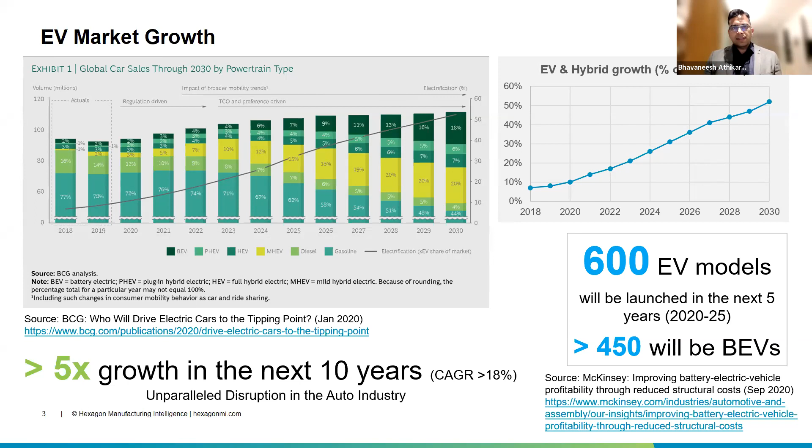But yeah, the technology which is used for the battery and the e-motors is changing and evolving. So that's an area where a lot of changes are happening. But these kinds of disruptive changes are happening in such a short period of time. So are we ready for it, or is the industry ready for it? What sort of disruption it would cause is a question which we need to think about.

Composites have been used. Also the battery technology, cabin interior. Mr. Mansingh talked about the challenge with acoustics we had with EVs, because the masking effect of the IC engine is gone. So BSR, buzz, squeak and rattle, becomes an issue with EVs. So cabin interior comfort is becoming another important aspect to address.

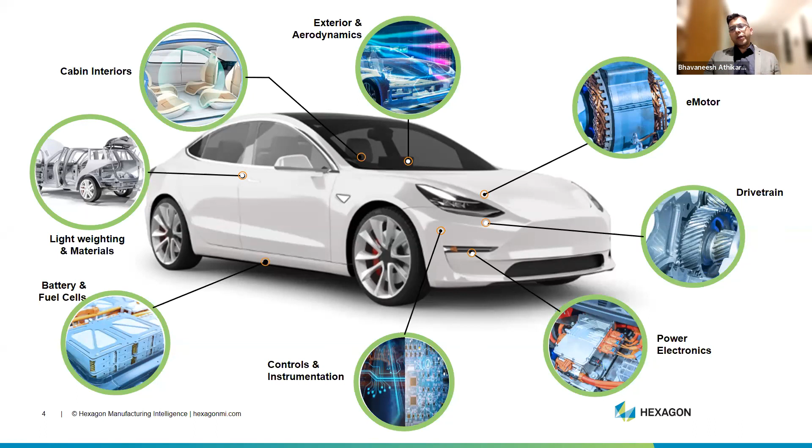So let me talk about the key design and manufacturing challenges for e-mobility today. These are some of the key challenges, not all. So first and foremost, which used to be the range anxiety issue, but it looks like the industry is addressing this challenge, and we are seeing a lot of development. Last week, we heard about the Mercedes announcement of the high level of range it had on a single charge. So how can simulation help here?

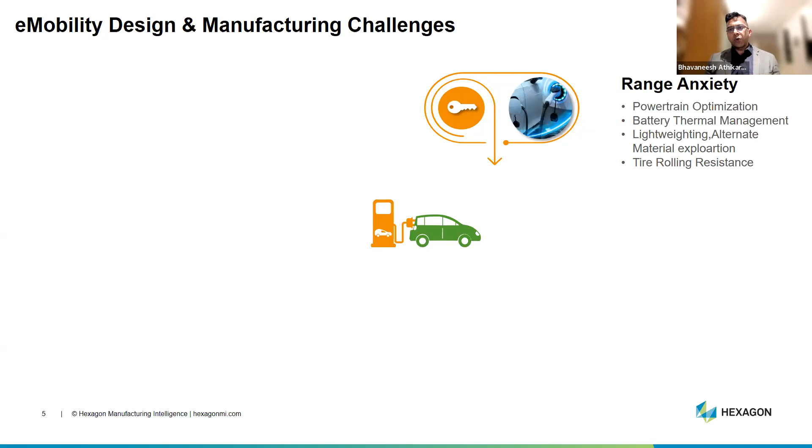So some of the ways we can address range anxiety, other than the policies and having a lot of charging stations: from a simulation or design point of view, the areas where we can add value are powertrain optimization, battery thermal management, lightweighting, alternate material exploration, and also innovation with tire rolling resistance. The second point is on manufacturing and quality assurance.

Now with new components coming into EVs, the expertise and skill needed to manufacture them is missing. So that's becoming another big challenge, manufacturing these subsystems, and also using the latest manufacturing techniques like additive manufacturing, or using dissimilar materials and joining them together.

So the conventional approach of welding them might not work. Can I use adhesive? Can I use rivets? How would be the strength? So those are some of the challenges.

Digital twins, as we've discussed in the panel discussion, and also the companies like Simple Energy, where Shresh just talked about, they are using the latest of technologies, and also the existing OEMs are moving towards best of manufacturing facilities what they have. They're moving more towards Industry 4.0. So for improving the productivity and efficiency, they're using a lot of smart manufacturing solutions. So that's another area of interest for EV development.

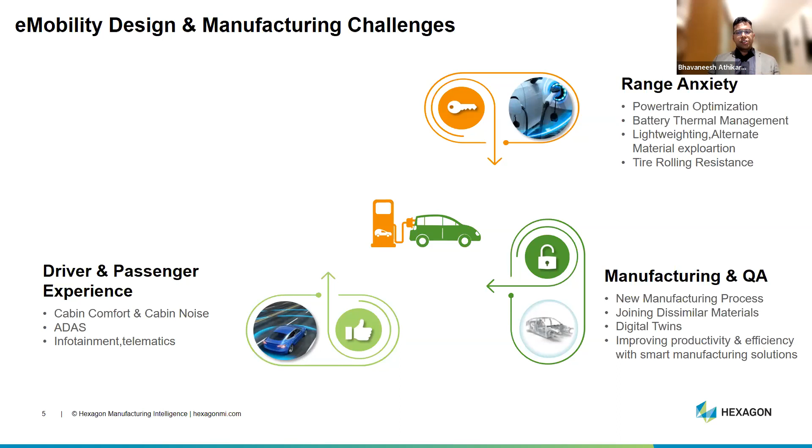And the final one is on the safety and the vehicle performance aspect. Safety, we have discussed now in the panel. Yes, there are a lot of safety related challenges which can be addressed through simulation, which I'll be talking on the coming slides. And also when we move to electric vehicle, the basic expectation is the vehicle performance should not be less as compared to IC engine, if not better.

So we have to ensure the acceleration, torque vectoring, vehicle dynamics aspect, noise, vibration, and harshness, durability of the vehicle. So that need to be addressed. So these are the 4 areas where simulation can significantly add a lot of value.

And that is what we are highlighting here on how upfront simulation can help. So with simulation, without even having a proto, you can generate a lot of what if scenarios. Innovation can happen in that concept design stage. And that is where you have a lot of flexibility to change around and play around with the design, and also will help you to reduce the cost a lot.

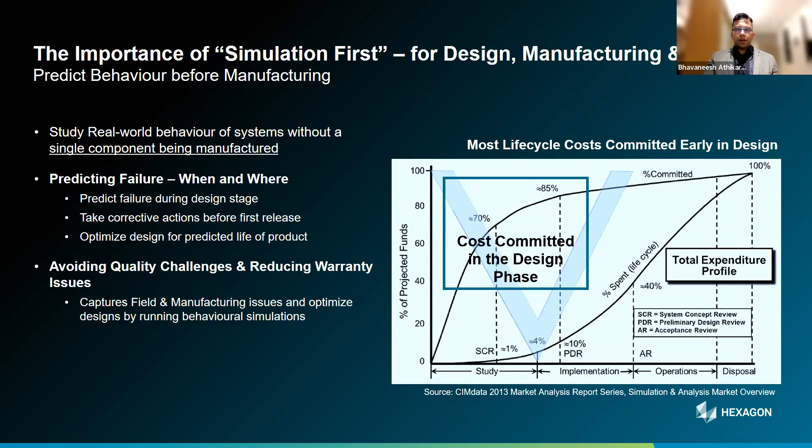So moving on to what are the key CAE or simulation solutions specific to electric vehicles. If you take the key subsystems like e-powertrain, the kind of noise generated from it, though it is not very noisy, the whine which comes out of electric powertrain is very irritating. That need to be addressed.

From a battery point of view, battery thermal management, cooling optimization, battery structural safety. As we discussed, the batteries are mainly at the bottom of the vehicle, and when a vehicle goes on a bump, an impact load which can short circuit a battery should not happen. So the battery structure should be strong enough or designed to take such loads, if any. And also from a body structure point of view, how different dissimilar materials are joined together.

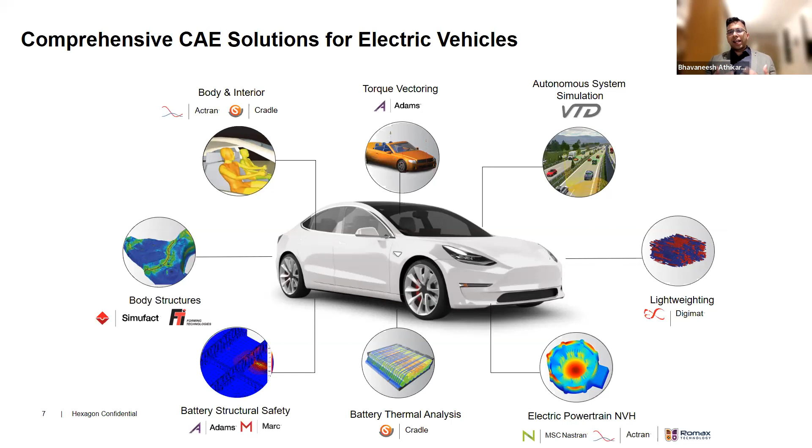Interior aspects, as I said, cabin comfort, torque vectoring, and also with e-mobility, there's also expectation of it being smarter. So how do we at least get some level of autonomy into our two-wheelers and four-wheelers today? That's where tools like virtual test drive can help you in designing these virtual scenarios and evaluate what if scenarios, the edge conditions, on validating your advanced driver assistance systems, advanced rider assistance systems upfront.

Similarly, for two-wheelers, most of the concept is same, but again, there are something very specific as well for two-wheelers. And one of the requirements is if a company whose USP is the sound or thump of the vehicle, then when they move to electric vehicle, the thump is lost. And as a rider, I love riding a vehicle which can create a good sound. So to address that sort of challenges, it's not a challenge, it's to address customers' requirements.

So there are a lot of companies looking at simulated noise or creating a signature noise of vehicles. That's something, again, we're working with a lot of two-wheeler companies on, not only two-wheelers, four-wheelers as well. As you know, the kind of sound a Ferrari can make, any EV cannot beat that, right? So how do I address that sort of a customer segment is also something which we need to see. So safety, performance, and value add are other aspects where simulation can play a big role.

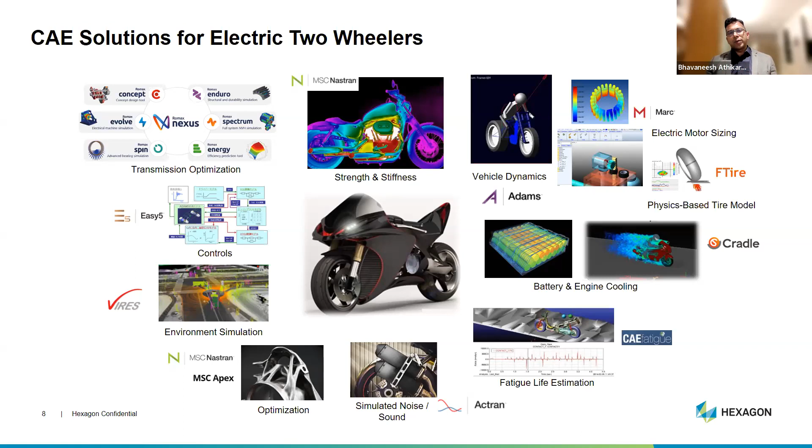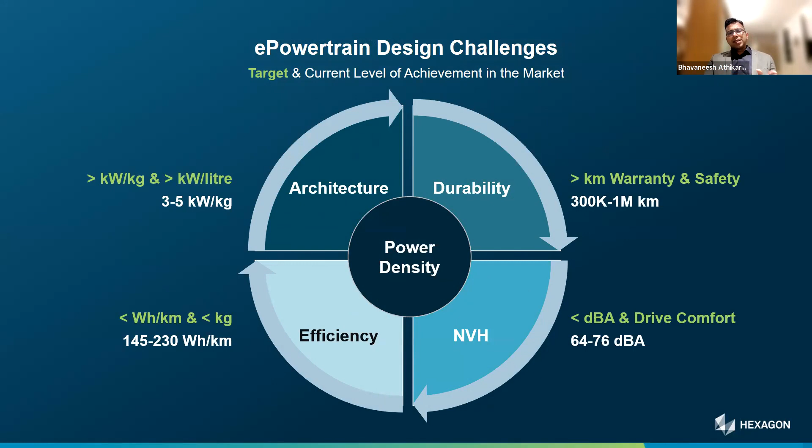So let me take some of the key components of your EVs and talk about how simulation can help. So the powertrain is almost like the heart of your EV. The challenges are from the durability, NVH, efficiency, and architecture aspects. These are some of the target ranges which are given.

But from a complete holistic development of e-powertrain point of view, we have solutions which can address architecture, efficiency, dimensional quality, thermal management, CNC aspects, and fatigue life estimation. Also, these e-motors and electrical components emit their own electromagnetic field, which needs to be shielded well so that the other electrical components function well. So EMI shielding, or electromagnetic interference, is becoming another key area in electric vehicles. Here again, we can explore different materials which can provide this sort of EMI shielding.

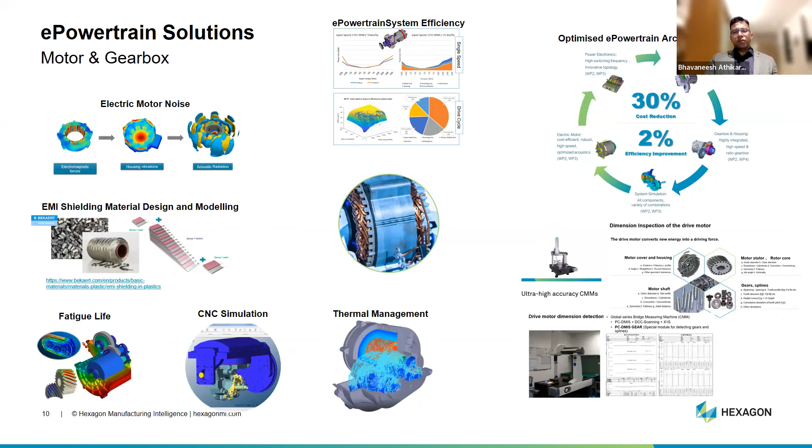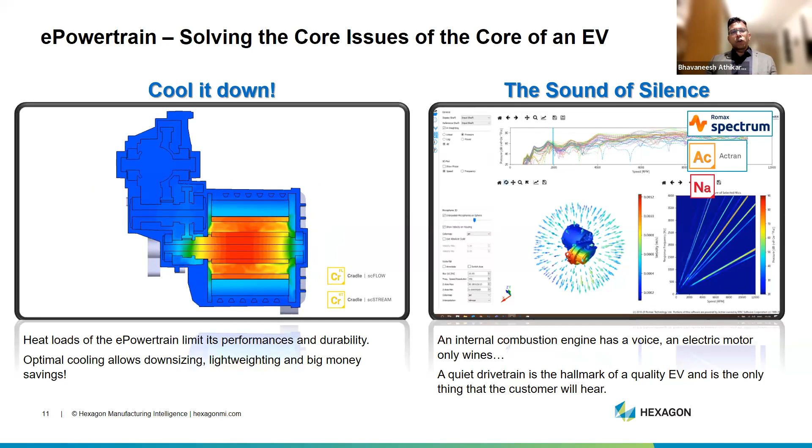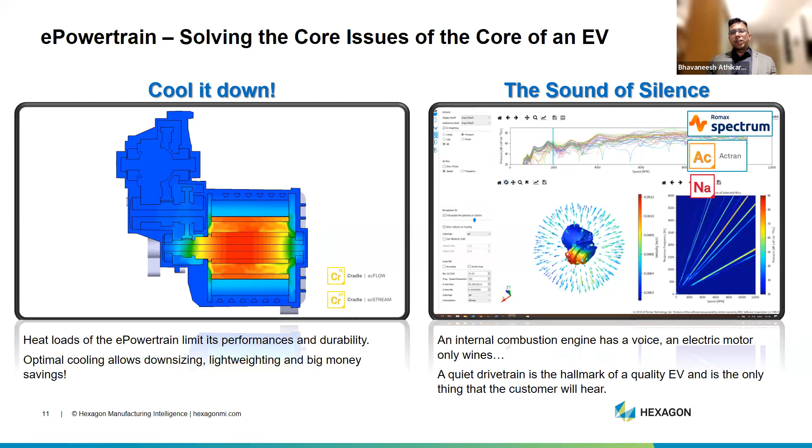And finally, the kind of noise generated from electric motors. So for the e-powertrain, the core thing the industry is talking about today is, one, how do I make it more efficient, the thermal management challenges. The other is the noise aspect. So we have workflows in place on how we can address these issues from powertrain thermal management and also noise from the electric motor. As I said, this might not be of high decibel, but the whine is an irritating noise which can irritate a lot of passengers within the vehicle. So that needs to be addressed as well.

So how are we uniquely placed? The solutioning we put together connects three important parts of product development of any electric vehicle subsystem or a vehicle as a whole. Design and validation is where you do a lot of concept designs and try them out in your virtual environment. Once that is done, that information is passed on to manufacturing, where you act on the information from design and validation and actually manufacture it. Once it is manufactured, using our metrology devices, we ensure that the quality of these subsystems is as designed.

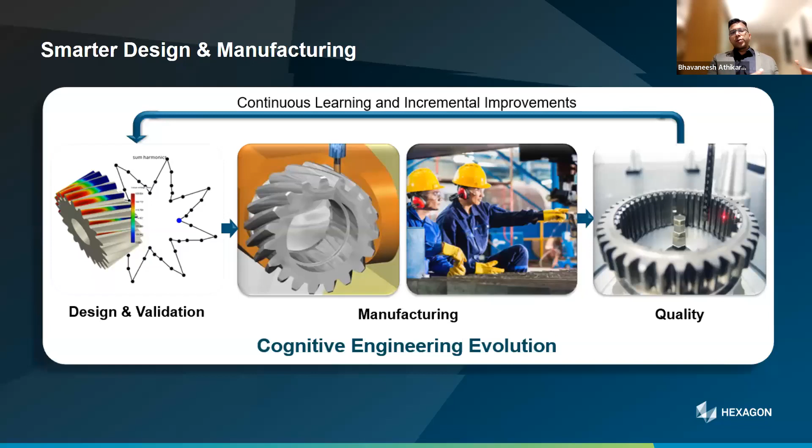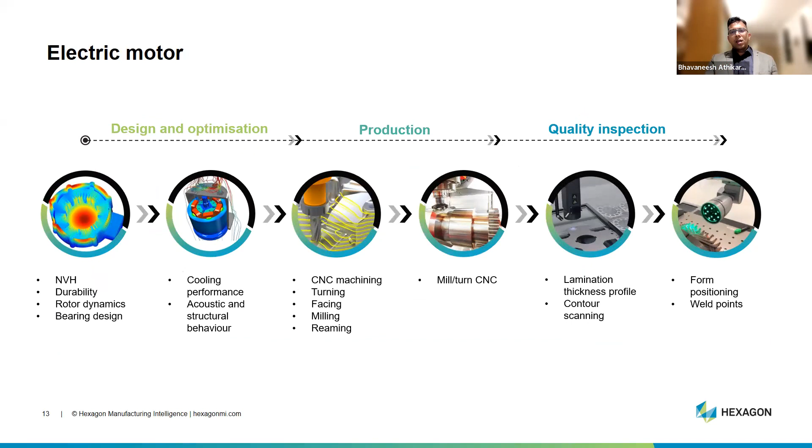So if there is any deviation with respect to the design, that information is passed back to the design cycle. This whole loop can be automated so you would have less or no difference between what has been designed and what has been manufactured. Based on that theme, for each of the key subsystems like the electric motor, drivetrain, and battery, we have workflows from design and optimization, production, and quality inspection point of view.

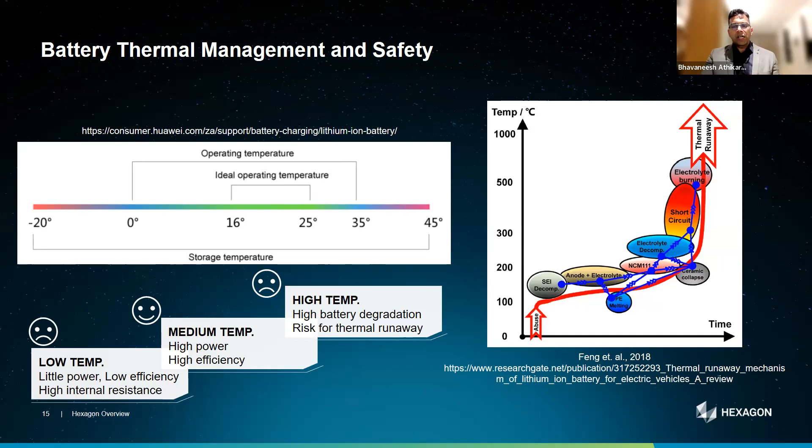So from a battery point of view, we discussed a lot about the issues and challenges we are facing today. This is a topic of very high interest in our country these days. If you look at this chart, it shows the optimum temperature for the battery to perform at its ideal condition: 16 to 25 degrees. Operating temperature is from 0 to 35, and storage temperature can be minus 20 to 45. So we have challenges at low temperature as well as high temperature. Low temperature means little power, low efficiency and high internal resistance, and high temperature means high battery degradation and risk of thermal runaway.

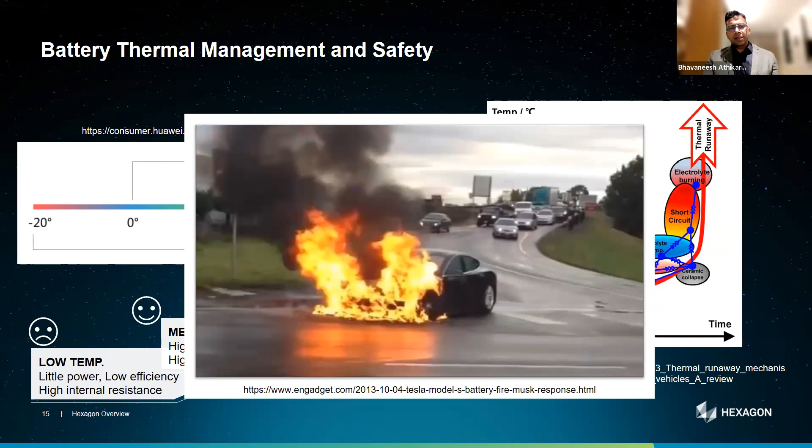So whatever you're seeing here today in India is not new. Globally, this is an image of a Tesla incident which happened a few years back. So this has happened in the past. It's not new, but how do we mitigate these sorts of incidents? That is where simulation can play a big role.

From an experimental test point of view, first, you definitely should have a strong, rigorous standard for evaluating these subsystems, which are very much safety critical. The key challenges with experimental testing are that it takes a long time, you need a prototype, it's expensive, and you need a suitable test facility. That's where numerical simulations can help you with less effort and model preparation time. We can set up these workflows for you so you can quickly test out the battery system against the validation plan you have.

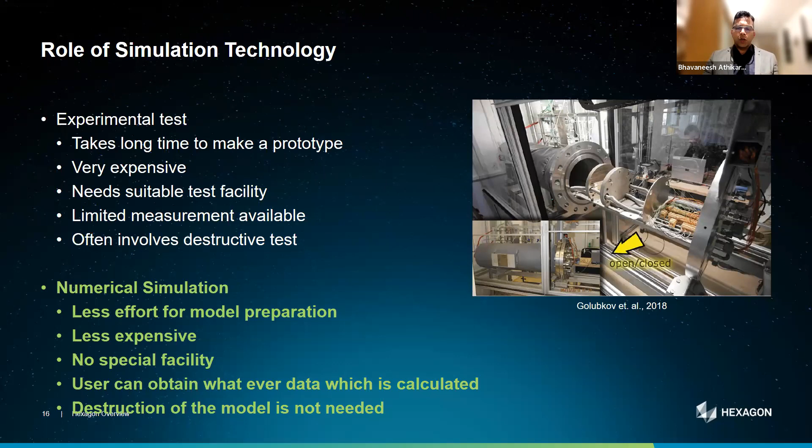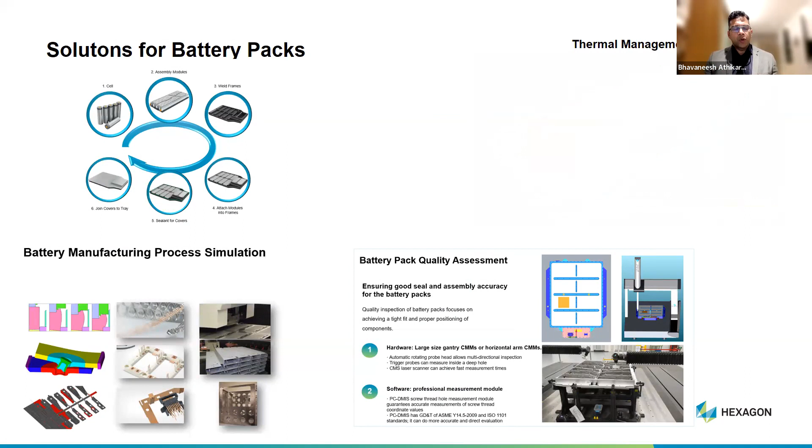Similarly, that was from a thermal point of view, but there could be other challenges for battery pack manufacturers on how these battery packs can be manufactured. From a manufacturing process simulation point of view, we can add a lot of value by helping the design process to be first time right, and also innovate at an early design stage.

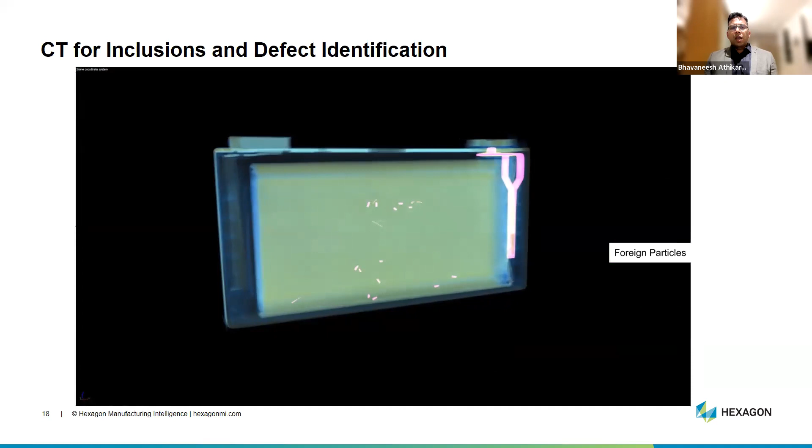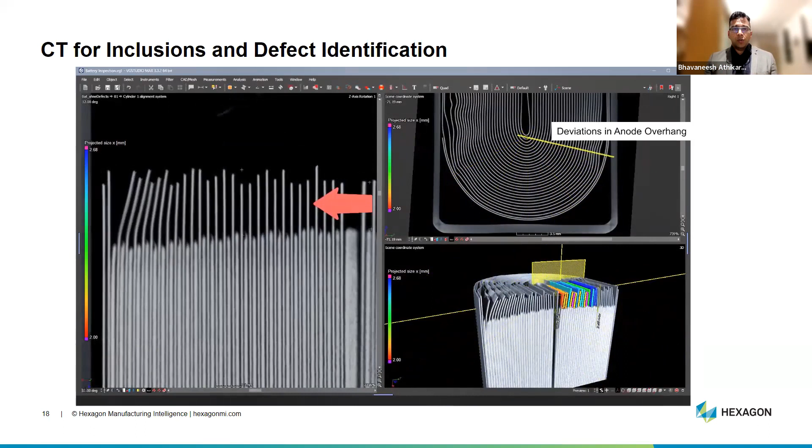Ensuring the quality within the part is another important aspect. For these parts, most of the time, if you want to see the inclusions and other defects within a battery, you need to cut it open. That's where computer tomography plays a role. This animation you're seeing here is of computer tomography from a software called Volume Graphics, which is us, showing all these variations and inclusions within your battery structure, helping you identify them without breaking it open.

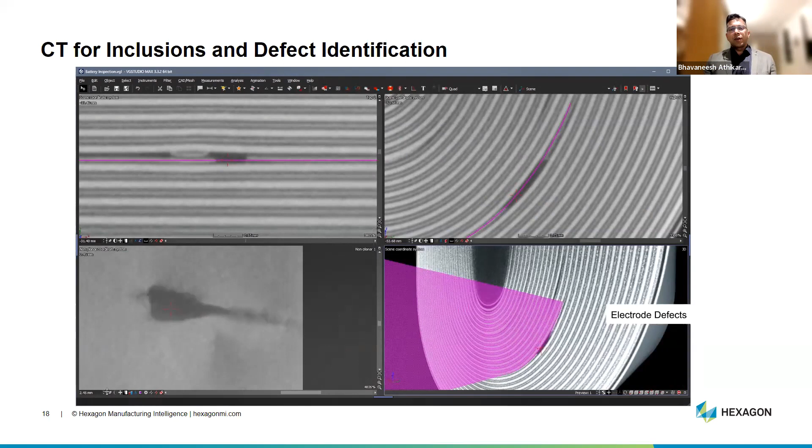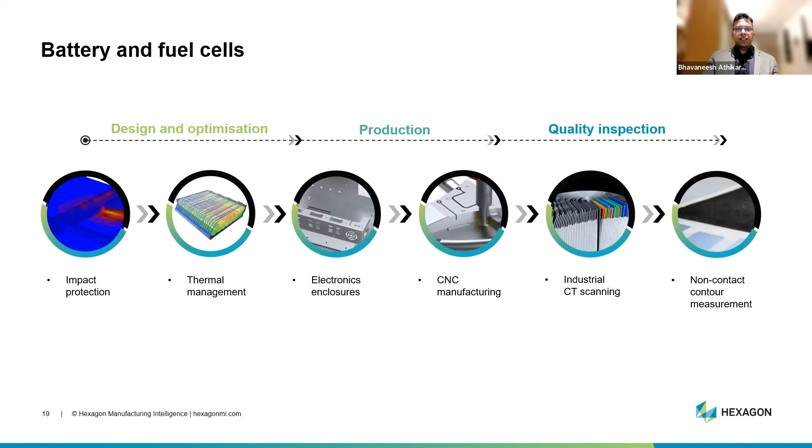Similar workflows for battery and fuel cells as well. We have these workflows built in for most of the key subsystems.

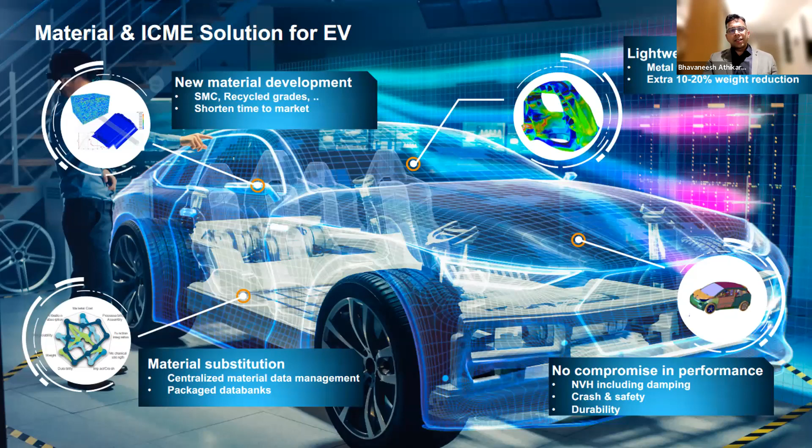Moving on to another important topic, which is material. I believe material will play a significant role in electric vehicle development, not only from a lightweighting aspect, but also from the performance aspect. From a range enhancement point of view, there is a lot of focus on using unconventional materials, or industry is looking beyond just metals today. There are also performance plastics which can do much better than metals and can be much lighter as well. There were a few challenges of mass production and repairability, which are being addressed today to an extent.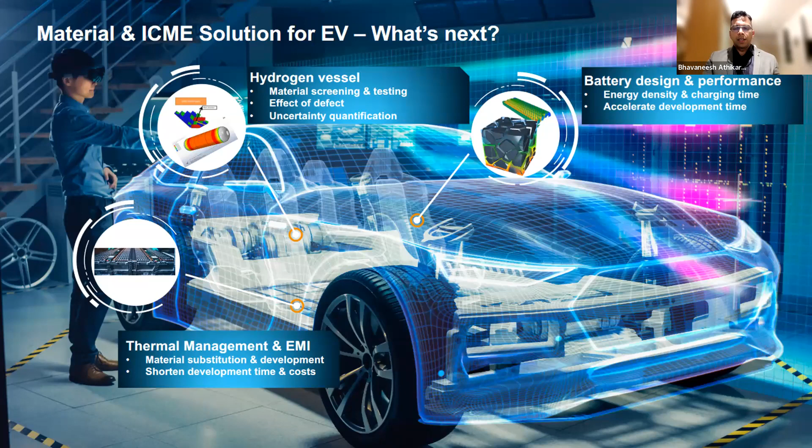When I talk about material, it's not only about the external body or load carrying members, it's also about increasing the energy density and charging time of a battery. We can also explore various battery materials which can be used, or the enclosures, battery packaging, EMI. All those aspects can be addressed by virtually simulating them in the design cycle. This is about the manufacturing process simulation.

There was a question on this which I discussed. This is what we can do if you take any manufacturing process from machining, forming, forging, stamping, welding, heat treatment, or even costing studies, can be done in the design cycle, ensuring that when you manufacture the part, it's first time right. So we can ensure that quality by optimizing the process parameters.

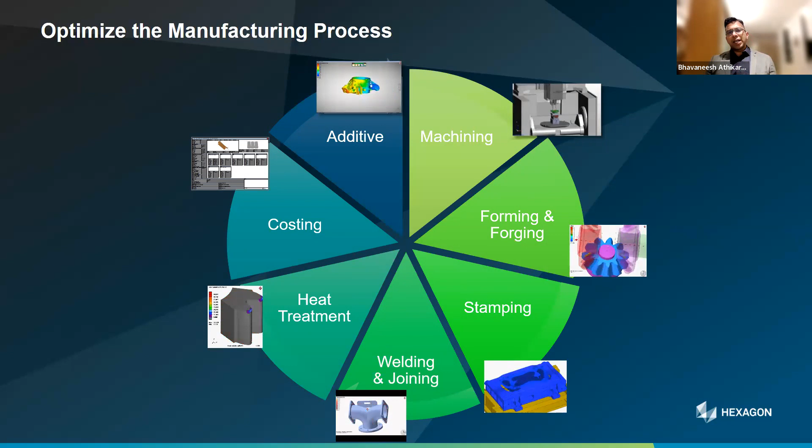With electric vehicles, there's also an expectation that the vehicles should be much smarter. That is where our advanced rider assistance system, autonomy, or advanced driver assistance system comes into play. We have solutions which can help you build such ADAS or ARAS systems and validate them using our solutions, from physical real world measurement systems to digital twin simulation, where you can simulate various scenarios and catch the edge cases where the vehicles are really seeing any threat and how they need to react.

It's basically how you're training the AI within your autonomous vehicle, under a particular scenario, how a vehicle needs to react. That can be trained, which used to take years in physical testing, today can be done in days. That's the progress we have made in validating autonomy, advanced driver assistance systems, or advanced rider assistance systems.

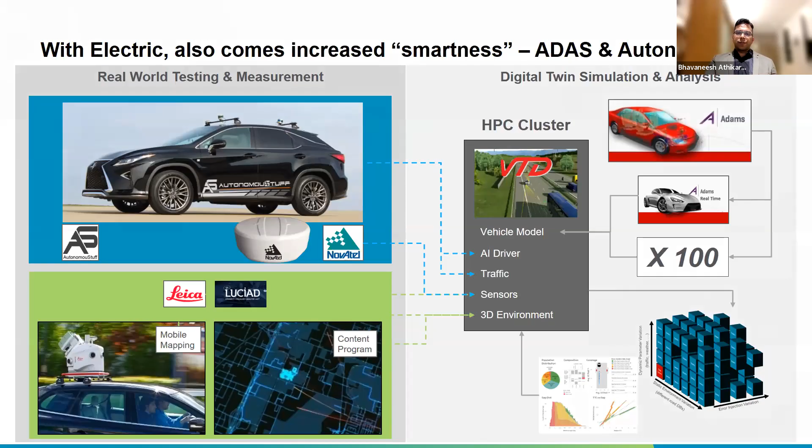This is about AI. We did highlight this as well, on how AI can help you take augmented decisions with a lot of information from manufacturing and design processes. This is not specific to EVs, it can be generic as well. There are companies which are building cars, bikes, scooters for years, and they have a lot of data sitting there somewhere on what challenges they face, how they addressed it, and all those aspects. How to use it is something where AI and ML can really help.

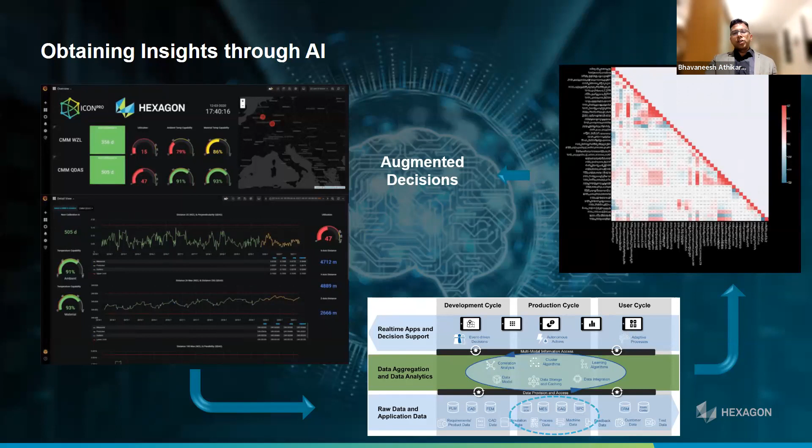Also, as my fellow panelists mentioned today, the vehicle is so smart that it's collecting all the information on rider behavior and all those aspects, which eventually need to be crunched, and some information out of it needs to come out in an augmented way. That's where AI and ML plays a role, and that's how it helps you.

The other important aspect, as I highlighted, is on the simulation side, on how reduced order models can help you. This is an example of battery short circuit analysis of a vehicle going over a bump, where there's an impact at the bottom causing a voltage spike, and then the short circuit analysis is done.

This analysis is done in a third-party explicit solver. If you look at the output here, we're seeing temperature distribution, voltage history, and deformation. Now compare how much time the full simulation took versus how much time the reduced order model simulation took - it's significant.

Almost 95% of time has been reduced. But don't look at this as an option to overcome conventional simulations. Imagine running a design of experiments where a large number of simulations need to be run, and each run, as you know, explicit scenarios take a lot of time. So instead of 24 hours of run time, if I can do a DOE case within 15 minutes, that's a great time saving.

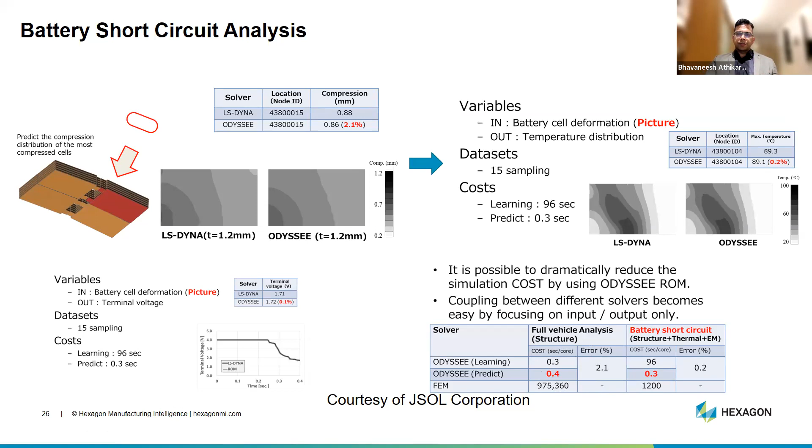Finally, on our applied solutions offerings - this is the consultancy division of Hexagon where we do everything from scratch concept design. Even before building a concept, we can do market research to find out whether it makes business sense for a new entrant to get into that market or not.

From market research to concept design and development, detailed design, proto development and testing, all the way to manufacturing process optimization for mass production - this is the capability our team has. They've done about 2,000 projects.

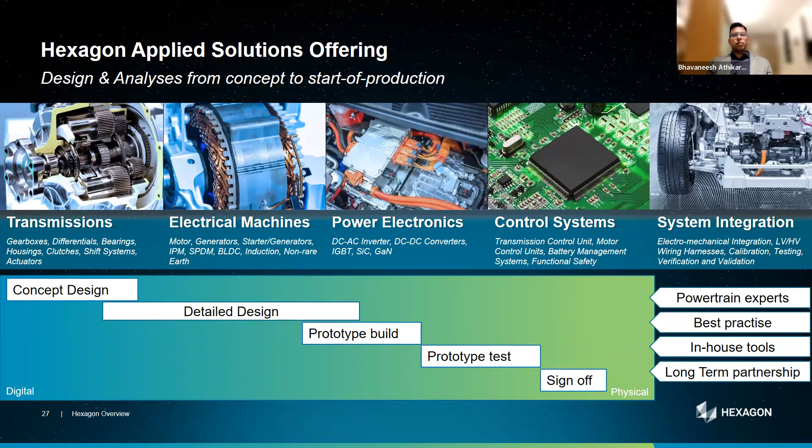We have a global team that sits out of our UK office, and these are some of the areas where their expertise lies. From an e-mobility point of view: transmission, electric machines, power electronics, control systems, and system integration. These are some of the successes which have been highlighted.

If I highlight some of the case studies, these are some of the successful projects we have delivered. This is a hybrid passenger car rear axle electric drive unit. The customer, entering the electrification market with a new product range, required engineering design support for a rear axle drive unit for hybrid passenger car application.

Another project was the development of a bespoke BEV electronics, hardware, and control software, developed for an SUV. This was again developed within a short span of 12 months.

Another project was a 12-35-ton heavy duty bus and truck platform. The customer wanted to start their electrification journey with a clean sheet of paper, intending to design a modular platform for their electric drivetrain solutions to replace legacy diesel solutions.

What we achieved here is a 10% more efficient solution than the previous direct drive powertrain, including 1/3 mass reduction, 1/3 size reduction, and 1/3 unit production cost reduction. This is what most industry players are looking for.

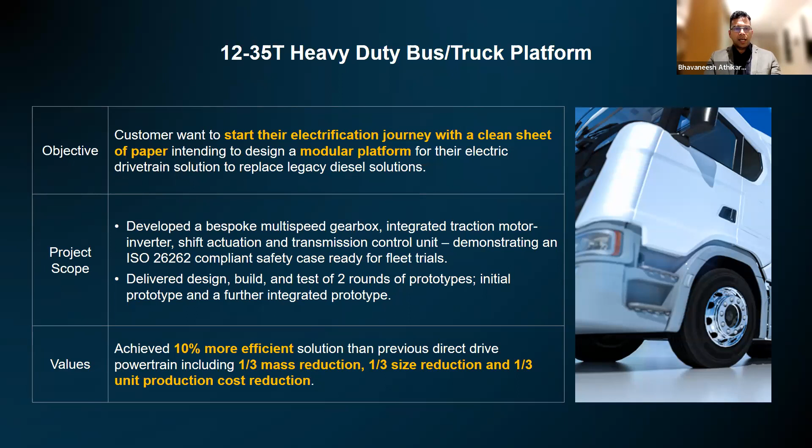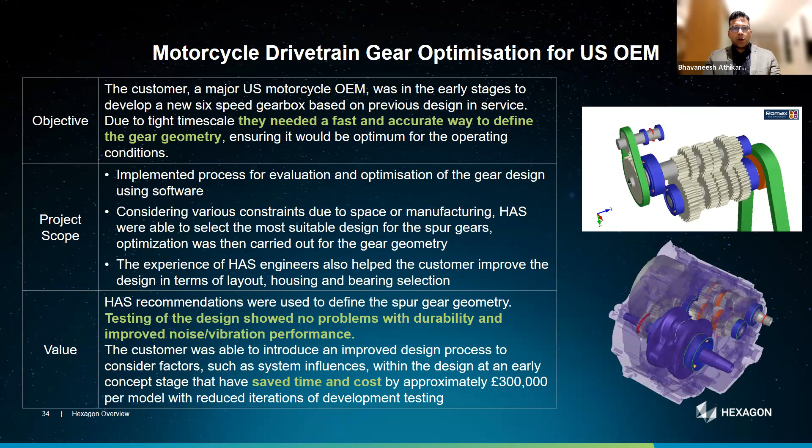Similarly, this is another project on an e-motorbike demonstration - gear train optimization, another project delivered for a US motorcycle OEM, and NVH assessment for an Indian OEM. These are some of the projects we have delivered so far.

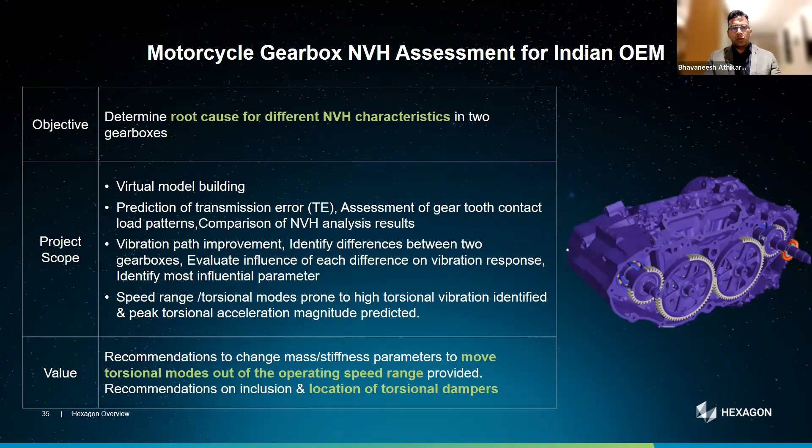We have much more to show, but we have limited time, so I'll stop my presentation here, and I'll be happy to address any questions you may have. Thank you, thank you all.